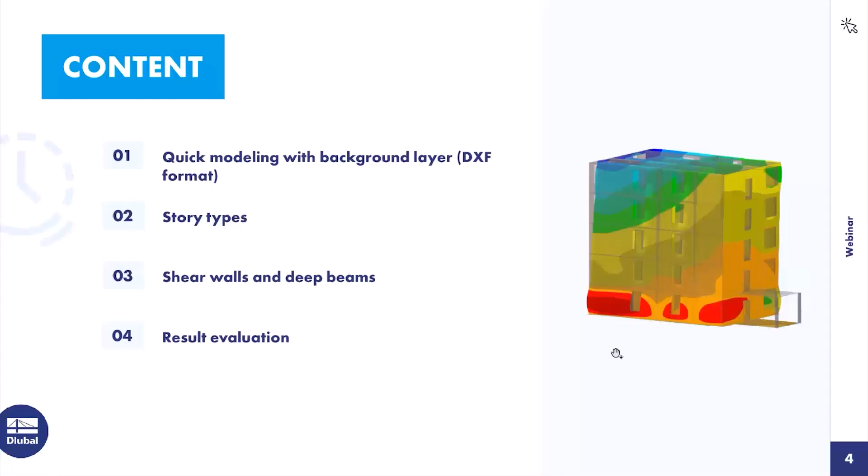Okay, then to our first topic, the quick modeling, here with a background layer for an easier way. I will import a DXF file, and it's a modeling option from bird's eye view, floor plan, top view, however you want to call it. And at this time we have added this button in the building model add-on.

It's an exclusive button, and you can see the objects you can generate or model in this bird's eye view. So then let's switch to RFEM 6, and I can show you what I mean.

Yeah, I start a new model. Let's call it building model. And at first we must activate the add-ons, of course the building model, and today also the concrete design, so I can show you the configurations and special options which are connected with the building model add-on when the concrete add-on is activated.

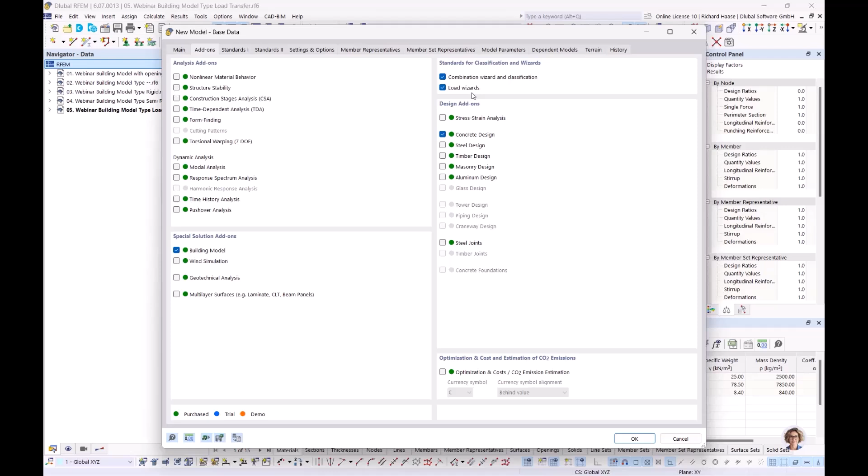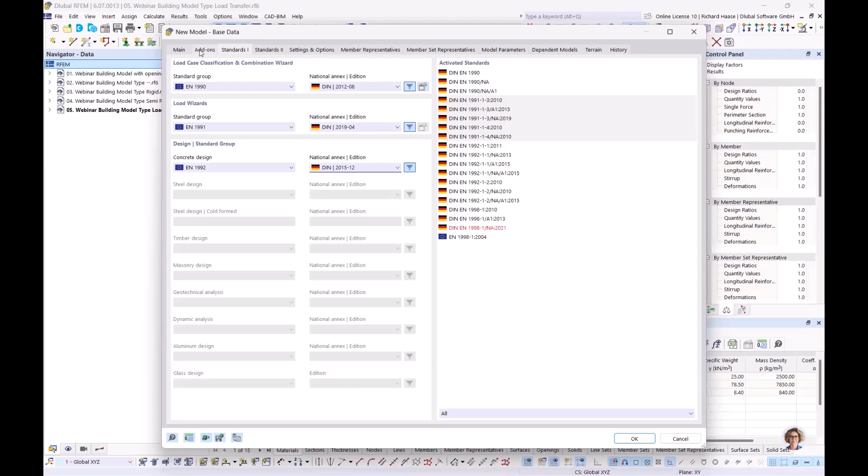And for the quick modeling, I also want to show you our load wizards. For this today we want to choose the German annex. So when you activate the building model,

automatically here under settings and options, our surface cells are activated, and this is a nice feature for surfaces which are, let's say, separated by lines or different parts, and you can control and modify the surface cells. But yeah, I will show you. So okay, then let's start with the new model.

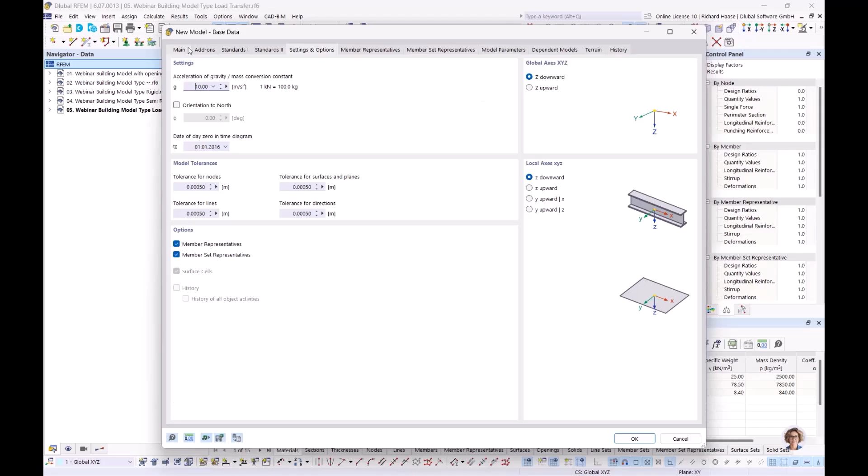Okay, then let's delete all objects so that we really have a new model. Let's start with the materials. There I need concrete at first.

Let's take C25/30. Then we need reinforced steel. Let's take the B500.

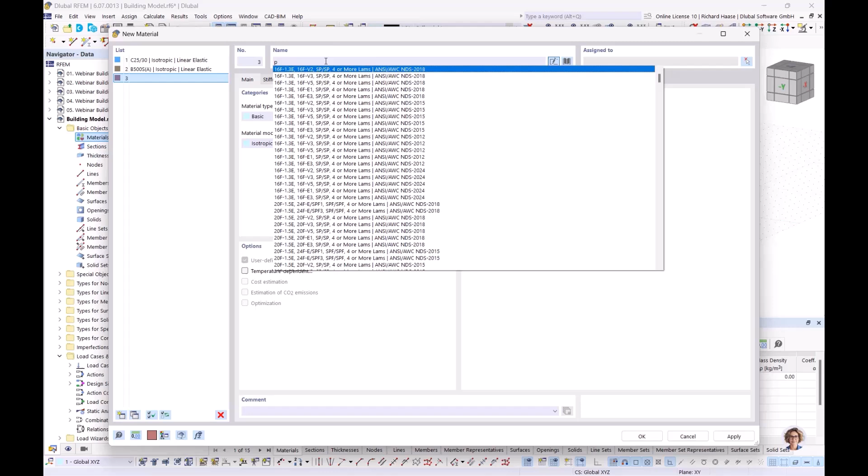Okay, and also we need masonry. There, let's take this one. Okay, then we have defined our materials.

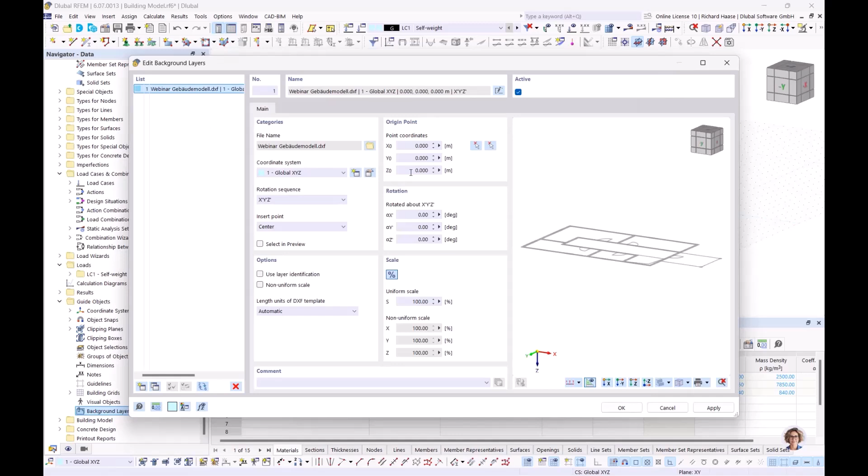Yeah, and okay, then I will upload my DXF file, my background layer, so I can show you what this building is about or how it looks like. And now we see it's nothing big, it's a simple model, but yeah, for this case it's good.

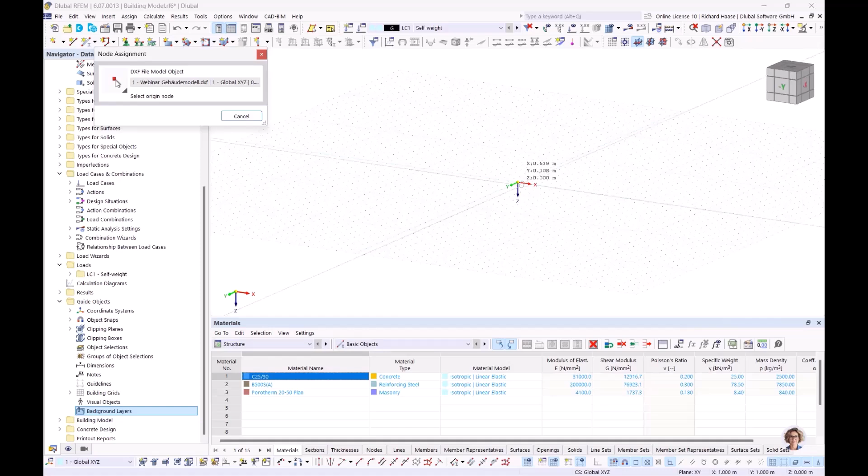Then let's change to meters. And when you add some background layers, you have two selecting points here. The first you can choose - I will set it here to the zero point - and the second you can choose in your DXF file. I added here some statical system lines. I will choose this line for this.

Now we have our DXF background layer, and the walls on the outside should be in masonry, and the inner side walls I will create in concrete. Also this slab cantilever, so not really cantilever, but it's only in the ground floor.

And here we have some columns. Let's go back to our definitions at the beginning. So materials we have defined. Now let's define our section. For the column, it's concrete.

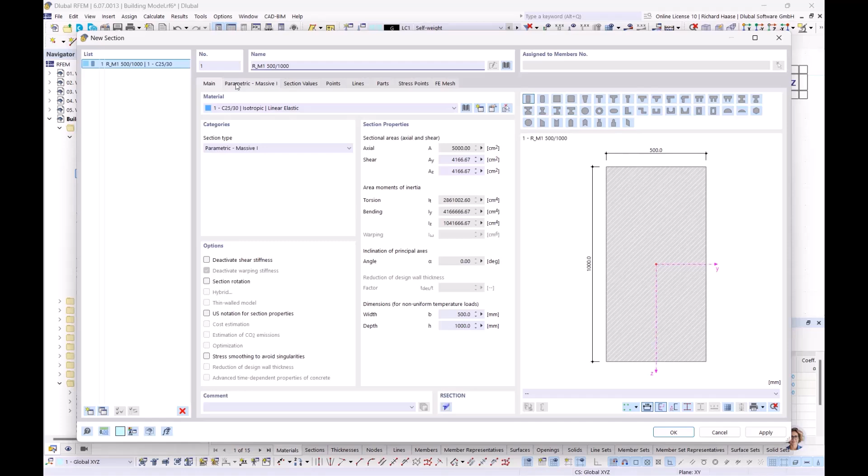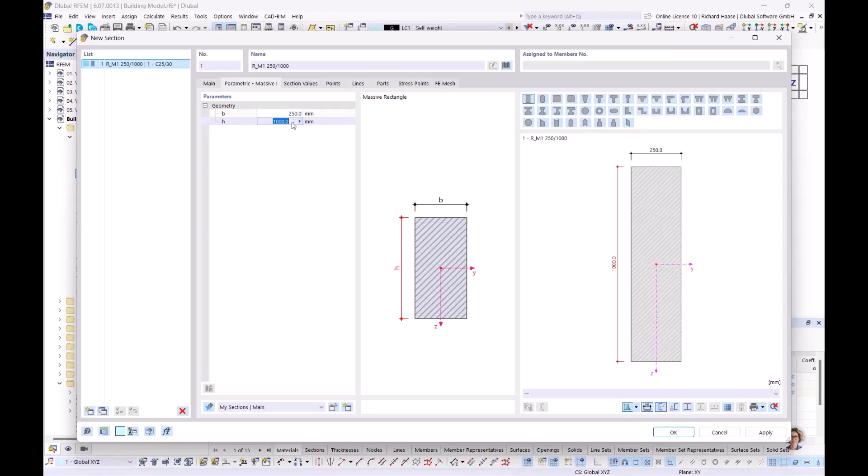Now I'll show you a nice feature. When you work with your DXF file, you have the option to measure the properties of the section. Let's take this - 25 centimeter, and also on the other side, also 25. Okay, let's say okay.

And now we need some thicknesses. Let's start with the masonry walls. And also we have here the same type. Let's choose this 24.

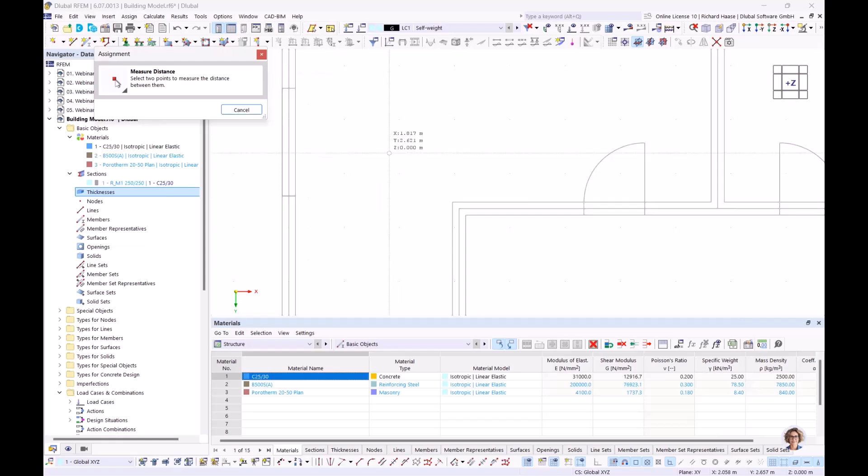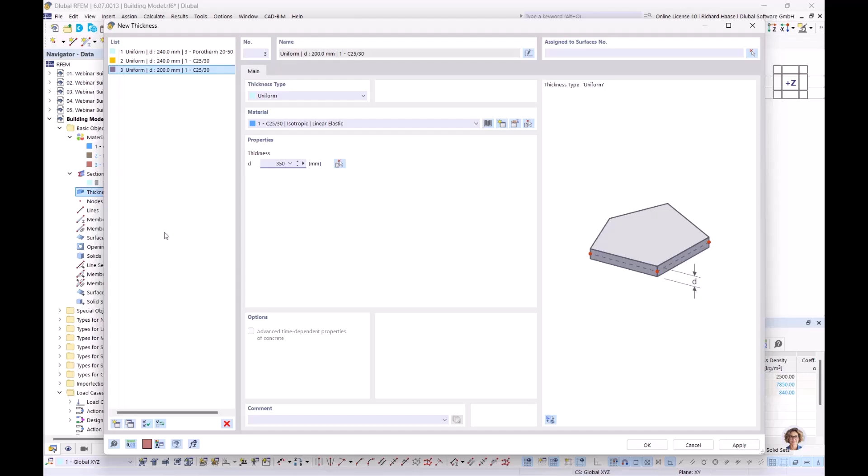For the walls on the inner side with the concrete material, we can do here best way 24. And for the foundation plate, let's say we want to have a thickness of 35 centimeter. Okay, let's say okay.

So we have defined the materials, the section, the thickness, and now let's go here. Then we must spring to the building model add-on, and we will define now our building stories.

A new one with a height of 3 meter, and now again 4. You also can model at first, but because of this fast modeling, you need to define the stories at first. And you can switch here, and now you see story heights here. And here are the floor modeling options, but I will show you at a later point.

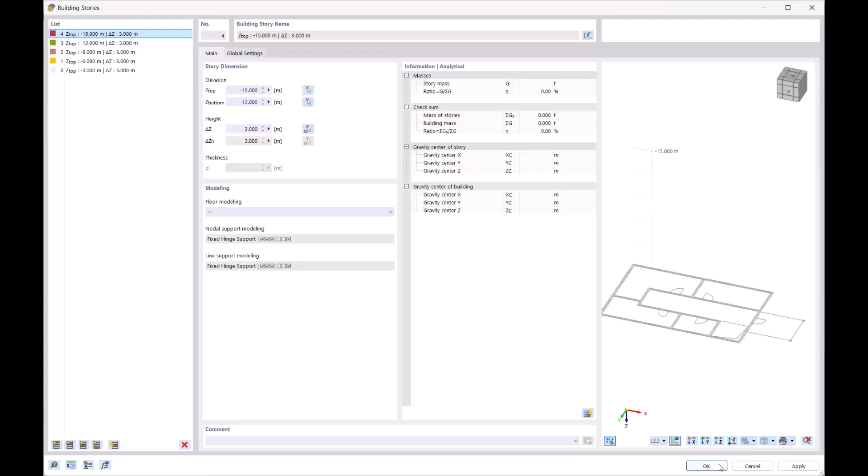So now we have our materials, our sections and thicknesses, and defined our stories. Now we can start to define with the fast modeling. Let's start with the walls - let's take here our masonry material, and now we can...

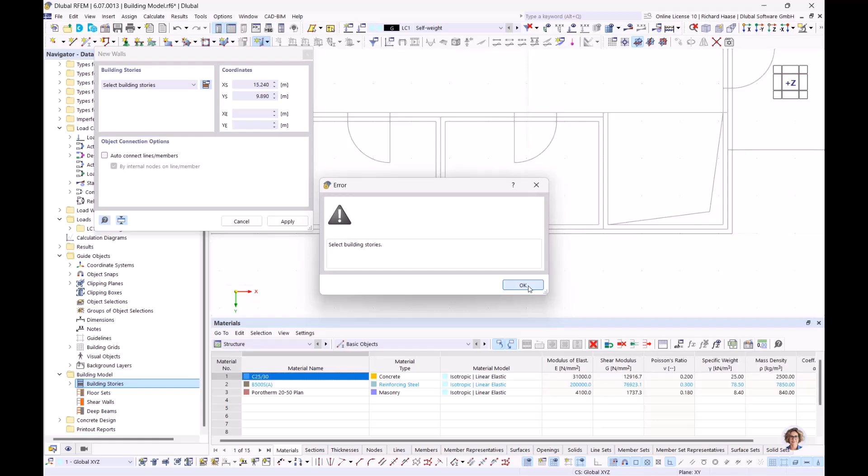For this you need to define the stories. So you can choose if you want these walls in this example only on one floor, or on different floors, or in our case we want to have these walls in all stories. Then apply, and let's start.

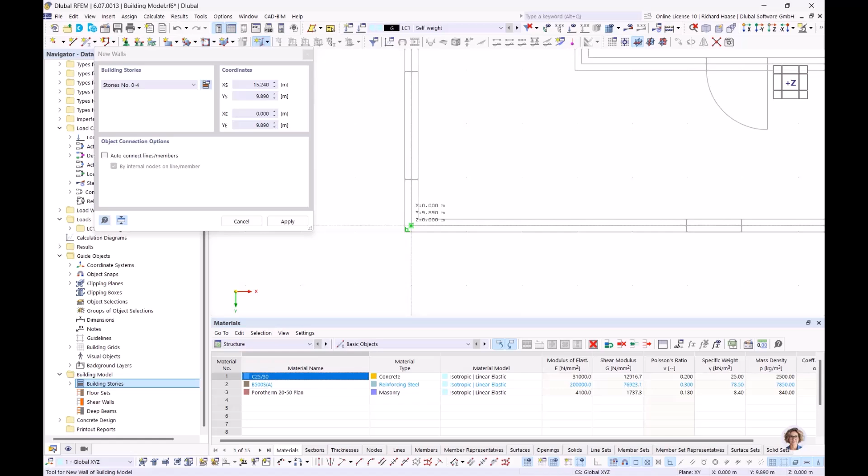So now you see here this mess, and it's also because of the building model add-on. The add-on now creates a center of mass, and now all these masonry walls are edited with their mass, for each story. So you see now all outside walls are created, but let's continue with the inside walls.

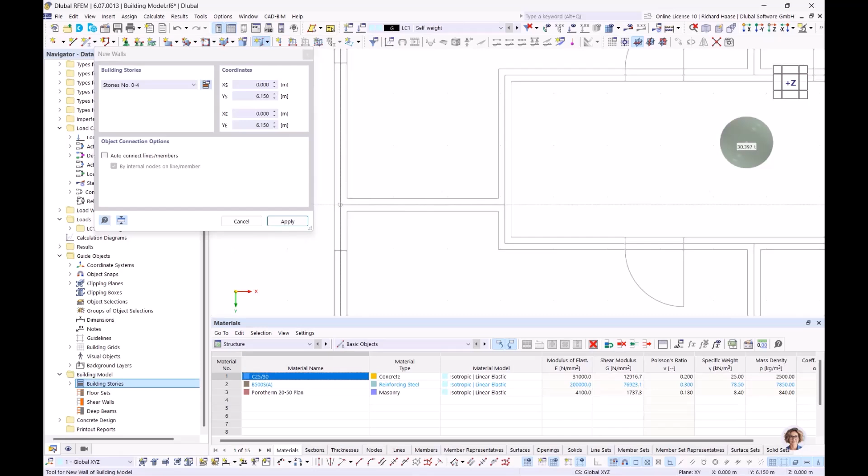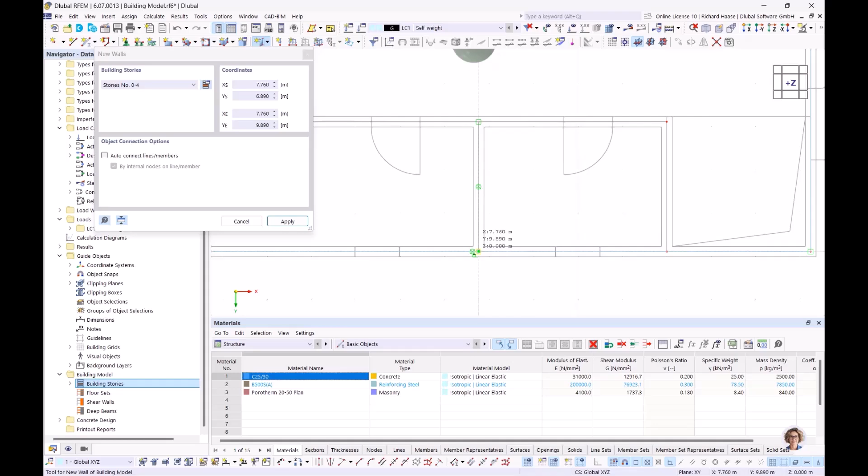24, yeah. Okay, here and here. Here and here. And the last one is here. Let's check if I get all walls. Yeah, it looks good.

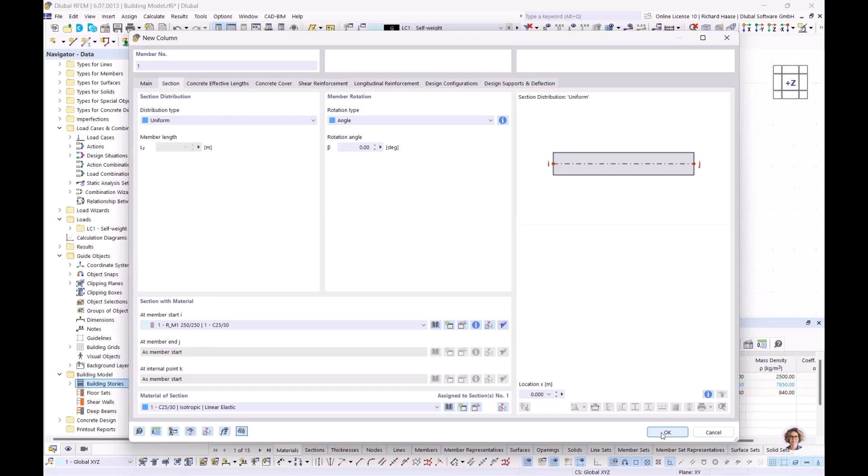Okay, then we want to define our columns with our section we have defined before. And now we don't want it in all stories, only in the ground floor. Say apply, and click here and click there.

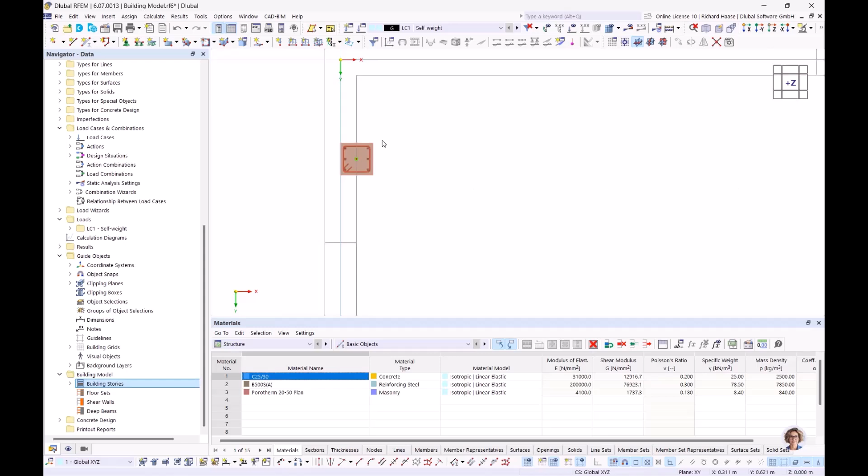Then same procedure for the floors. So 24, okay, and for all stories, apply. Oh, a moment, that's wrong. Okay, again - floor for all, and apply.

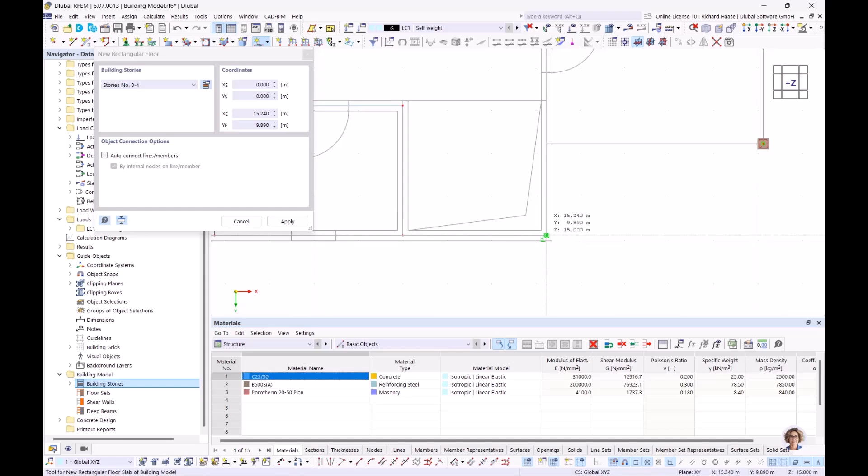And yeah, okay, now we have also floors. Now we need this, I say, cantilever floor. Okay, also 24, and only in the ground floor.

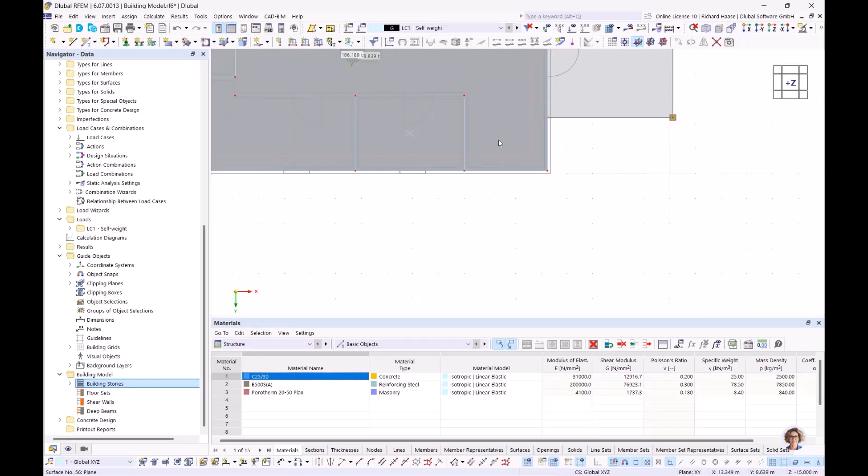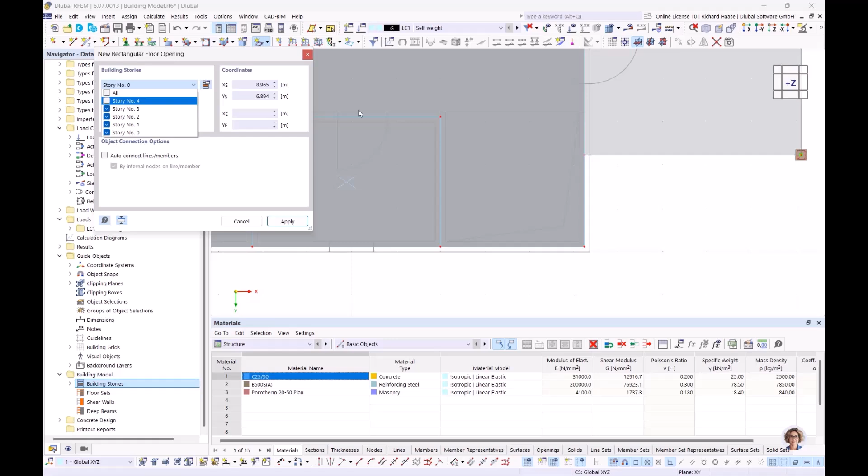Let's start at this point. And here we have an opening in the floors for stairs. Let's define this floor opening. Here, let's see - not in the last floor. And okay.

So now we have our openings, and you see, in a short time you have generated a building. The only thing you must generate manually are the openings, the windows and the doors, for example, or other openings in the building.

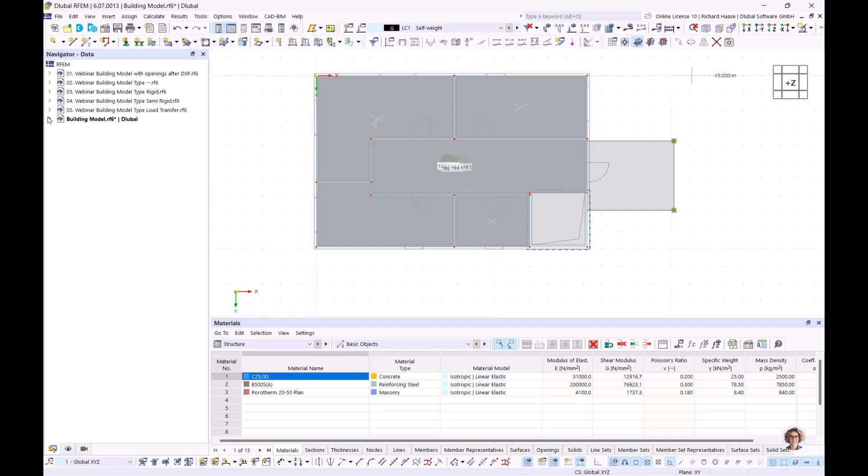And to not waste time, I have modeled this here. Maybe I can switch back to the full model, and there you see the openings. And I added also some load transfer surfaces.

Because imagine when you define wind loads and you define it only on the masonry surfaces, these areas for a closed model are missing at the end. So you can define these load transfer surfaces, and these surfaces only transfer the loads to the sides, and don't have a stiffness effect or such thing, only for load transfer.

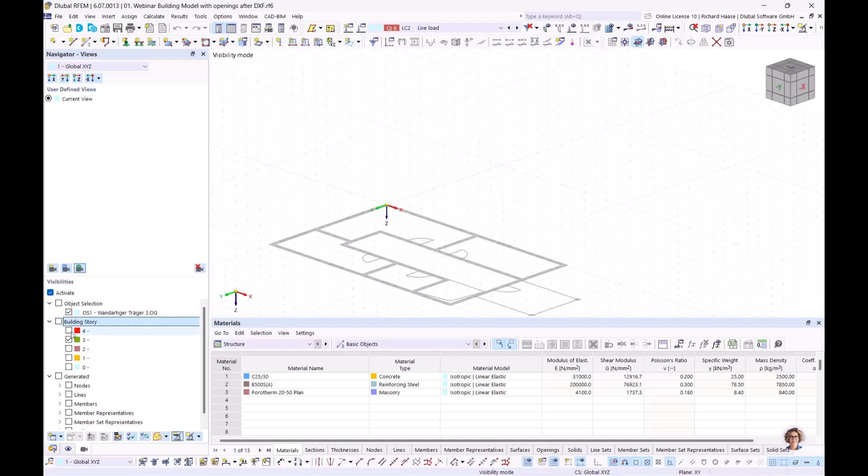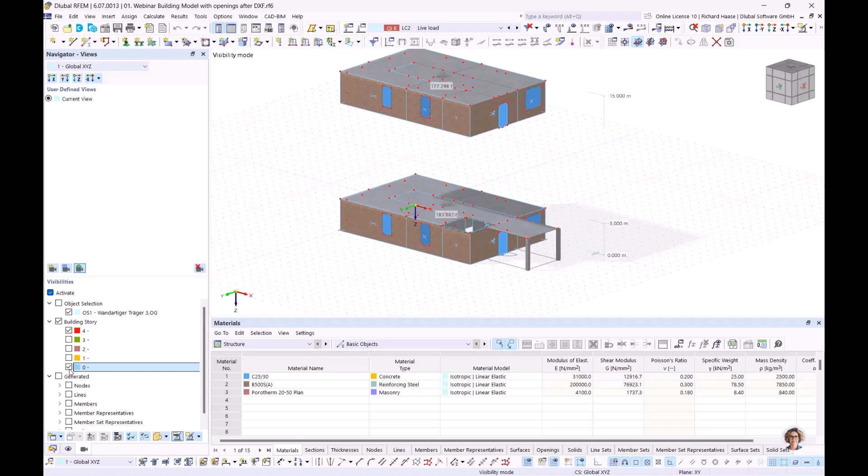Okay, then another nice feature which the building model makes automatically is in the navigator views. There is a point 'building story', and when you activate it, you see every story you define - there's automatically created a view, so you can fast spring between the stories for loads and such things, and I find it's a very nice feature.

Okay, then what I want to show you also - for example here you see it's one big wall, and you see these blue crosses. Oh wait, maybe we change the view. Oh, it's not functioning how I want it.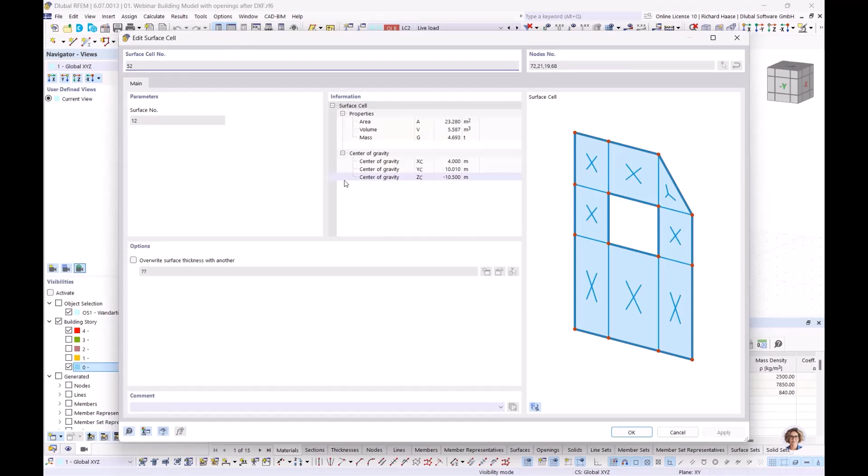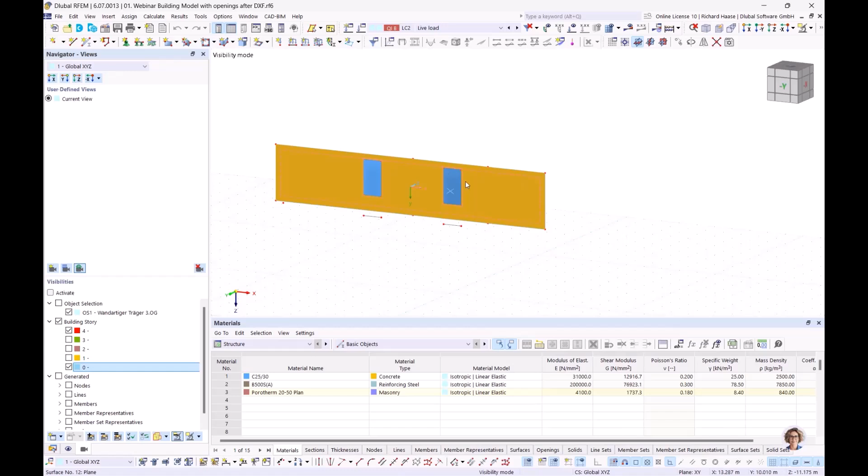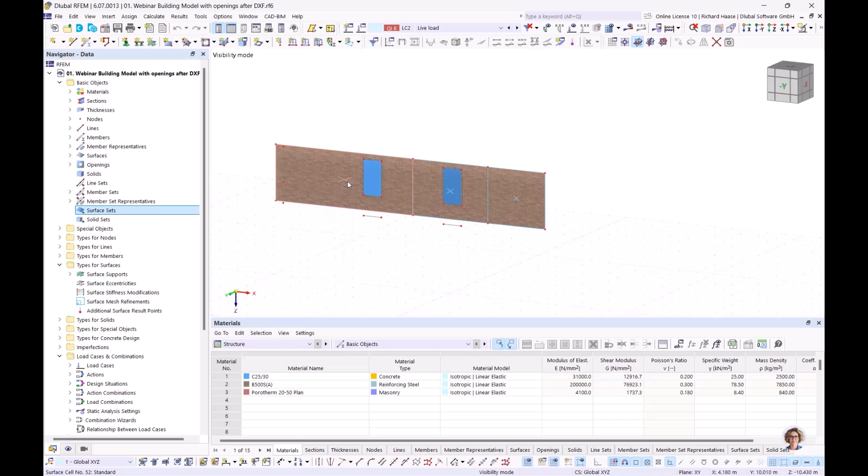You have only one big surface, and with this surface cells you have the option, when you click on the surface cell, to give these cells other thicknesses. Then with the different thicknesses you can also design the surface as one surface, so it's nearly the same effect as when you use surface sets, but it's an easier and faster way to define this.

Then I want to show you in the concrete design, when you activate the building model add-on and also the concrete design, you find in the configurations some additional points which are only possible with this model add-on - some options for deep beams and for shear walls. So that's now possible.

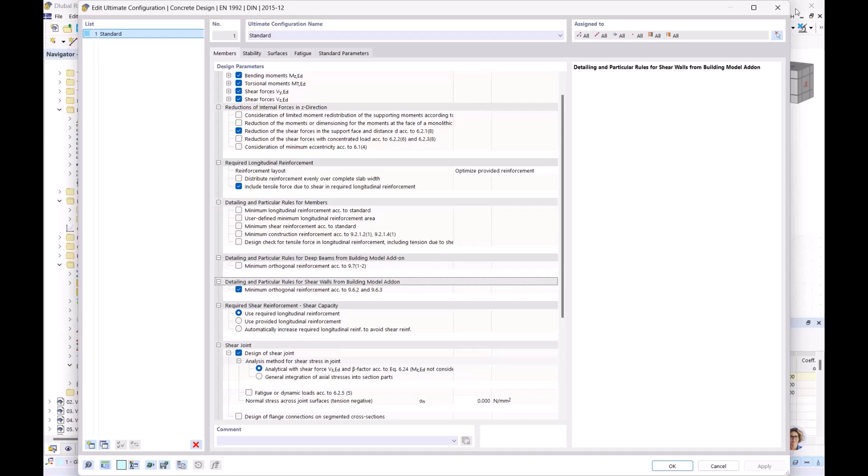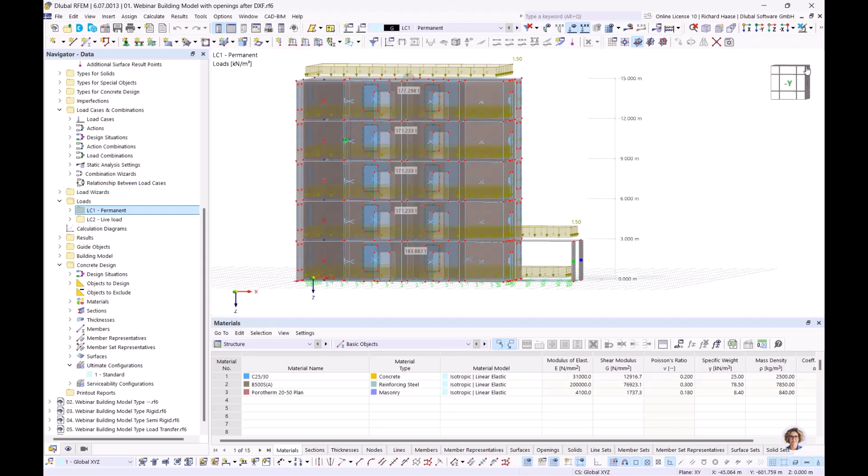Then what I also told you before, maybe we switch to the loads. Here we have some permanent loads, nothing special, and here's some live loads. Now I want to show you the easy way to design wind loads with our load wizard.

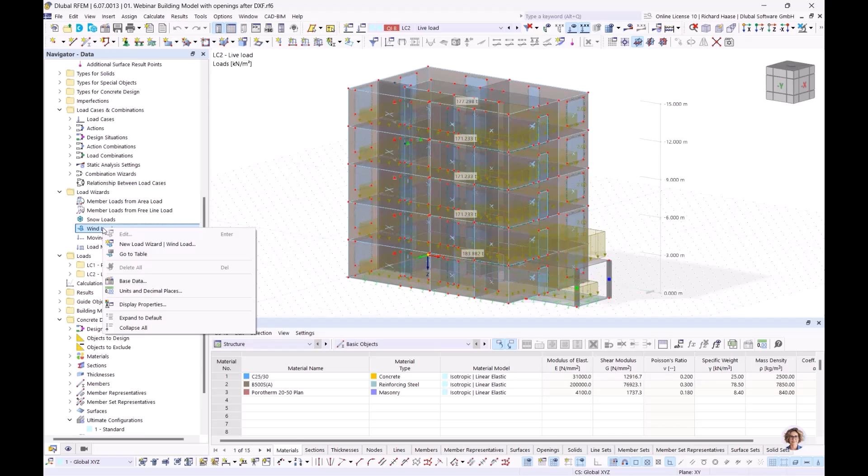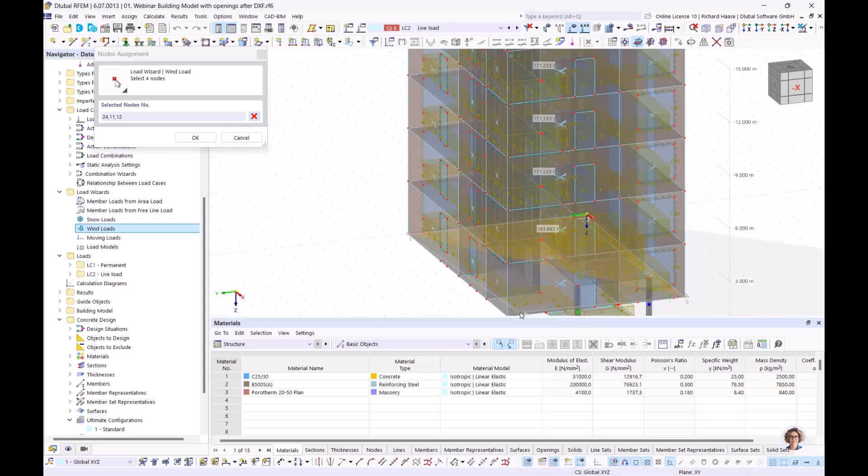We find this here, and for example here our wind loads. So we have a flat roof, and now we want to find the base corners, and also the roof corners. Now you see all walls are automatically - RFEM sees automatically the needed walls and roofs.

Another nice feature is the definition type with map and parameters. That's the way I switch to the German annex, because you need this national annex to define or to get or to select on the wind load map.

So let's for example choose the headquarter of Dlubal, it's here in Tiefenbach, Zellweg 2. Okay, why I'm not connected? One moment. Okay, now we have it.

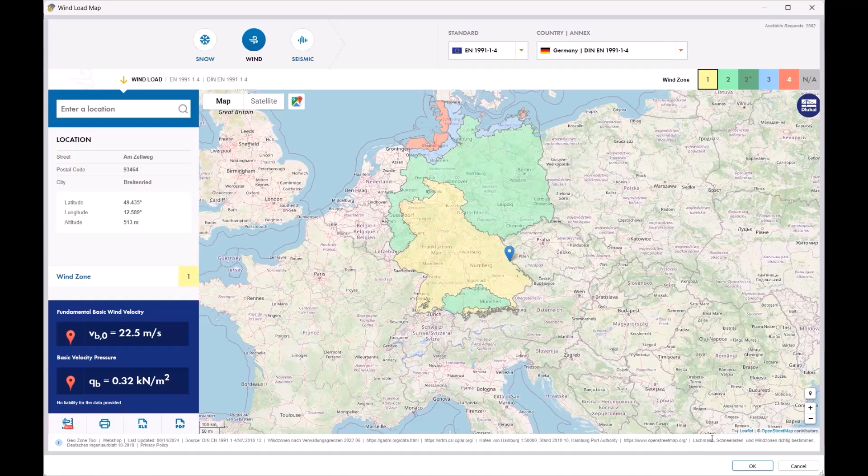Okay, let's say okay, and you see the program transfers information from these wind load maps - the terrain category, load zones, and all information for the wind loads.

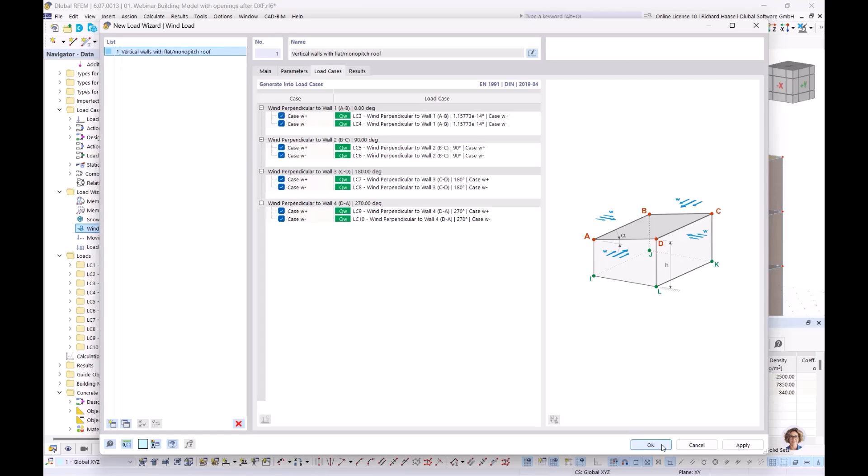Also, you can generate per direction automatically load cases. Let's do this here with this button. And you see all directions. Now we have our wind loads fast and correctly generated for all directions.

I find it's a very nice feature. The same for snow loads, but also a connection with the Google Maps view. So with this load maps, the same procedure. And then for buildings we have very fast the snow and wind loads generated.

Okay, that's the points about the quick modeling. Then I will switch back to my PowerPoint presentation to the second point, the story types.

After definition of the stories, you have these 4 types. What are these 4 types exactly? I will tell you now. Before that, independent of which type you choose, you get specific results for mass and story by story results. I will show you at the end of my webinar. So okay, then let's start with this first type.

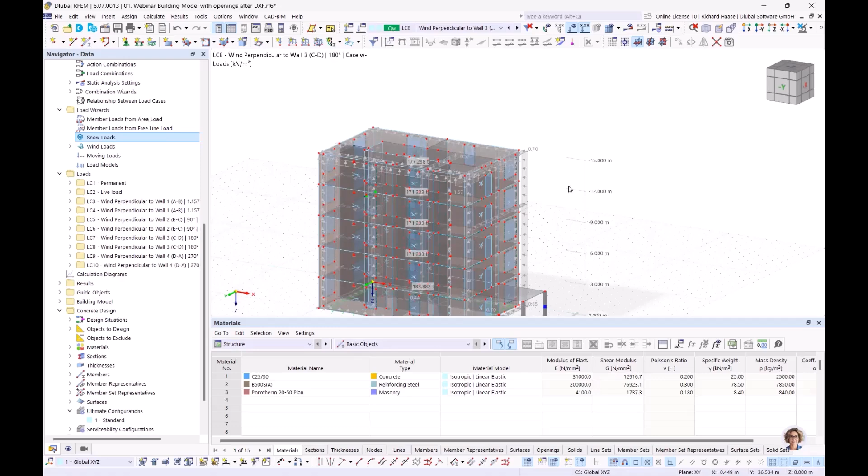Okay, then let's switch back to RFEM 6. So maybe for a better overview, I will close some windows. Okay, I've saved another way. Now we have our four types. Let's start with our type load transfer, so I can show you what is happening here.

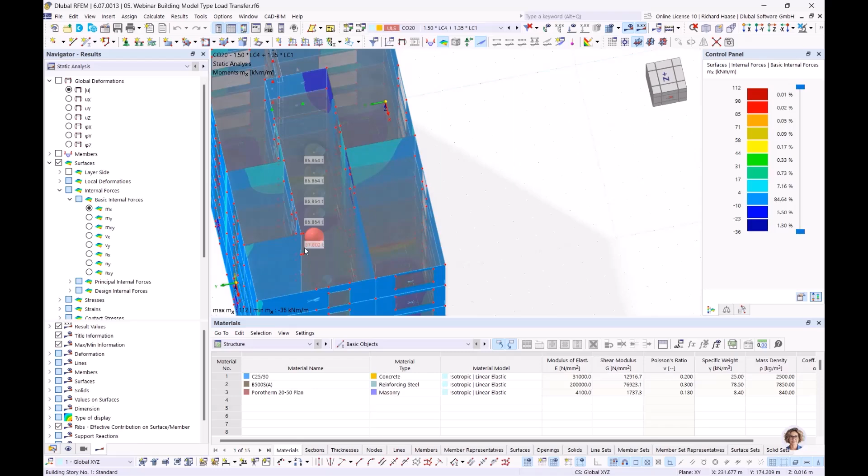So we want a static analysis, and for example bending moments. When you see here, we have no moments in the floors, no forces in the slabs, only forces in the walls. So here no wall, no slab is activated. So it's really a simple load transfer.

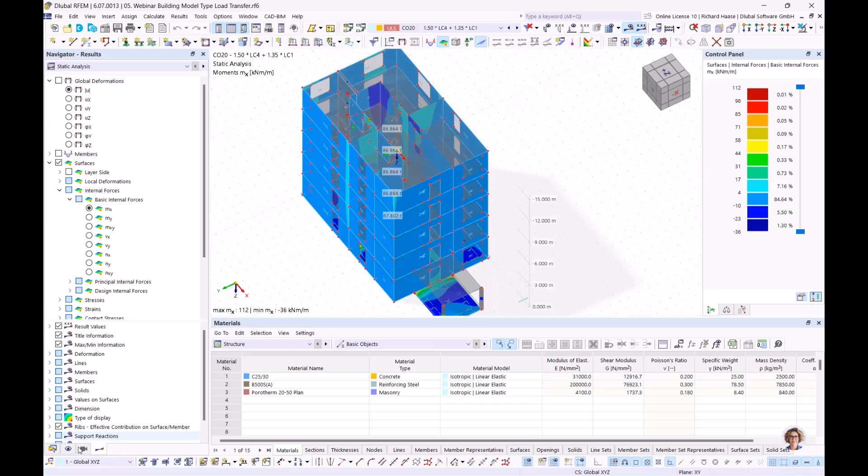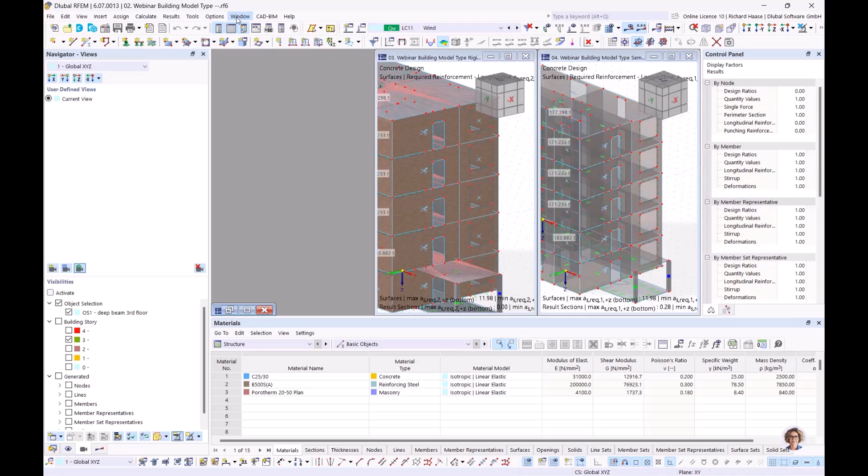So then we can close this too, and now let's compare this way. Moment, and maybe we can minimize this, and again here. So now we have our rigid type, and I choose the third floor.

Okay, and we want to have the same overview for our semi-rigid type, so I can show you the differences directly. Visibility is still activated. Okay, then let's choose a load case with wind and self-weight for both.

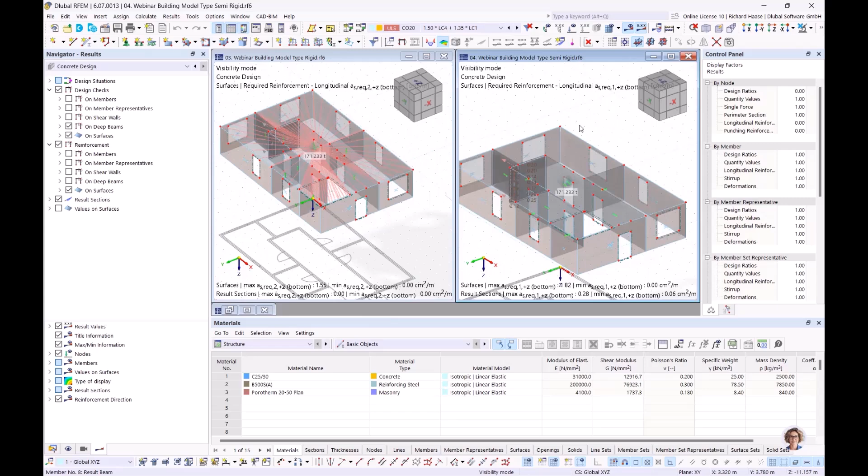So when we now switch to the static analysis, we have here an additional point, analysis of building stories, and this analysis is only possible with the type rigid diaphragm or semi-rigid diaphragm. So then maybe let's look at the floors first.

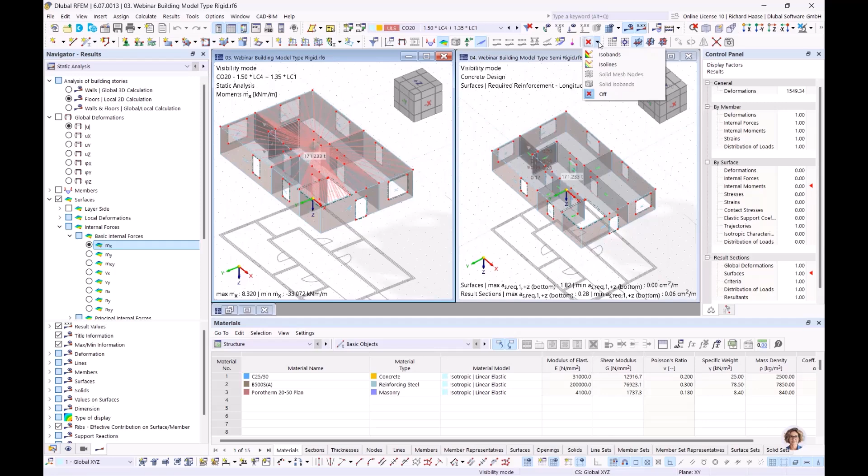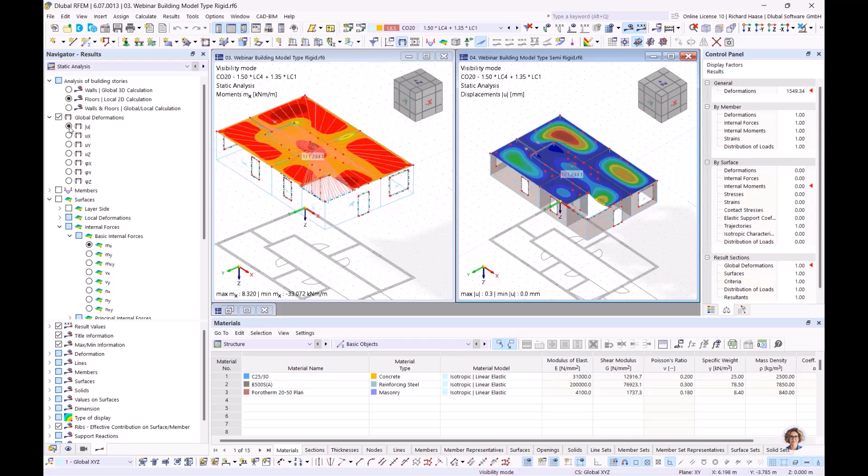Moment is okay. Let's switch to isobands. And here we need also MX. You see here between type rigid and semi-rigid there are no differences, it's exactly the same calculation. Also when we switch to deformations, for example, it's really exactly the same.

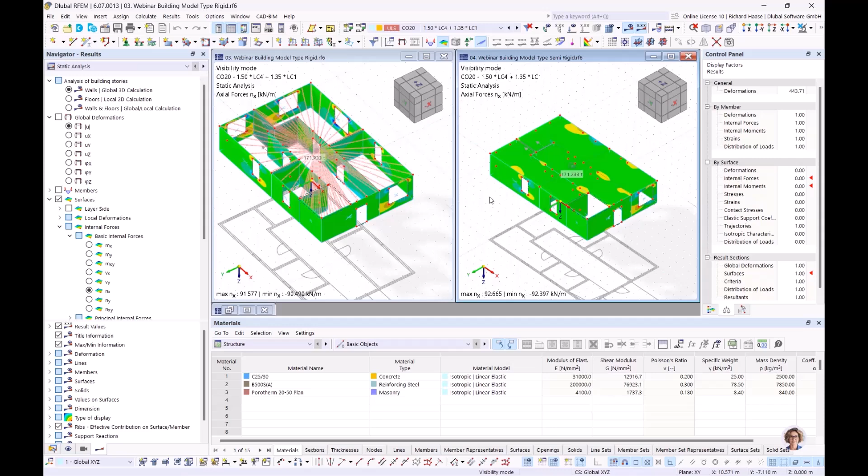And the difference is in this walls calculation. So when we look at our rigid type, maybe again at X, also an X, yeah you can see it here. In the rigid type, the slab is here with infinite stiffness and doesn't have an effect on the calculation for the walls. So the walls stand alone more and more.

And here in the semi-rigid type, the slab also has an effect in the 3D calculation of the walls. So also for the deformations you can see it here. Here we have only 1.8 because of the stiff slab, and here this softer slab, through the real rigidity of the slab, we have a bigger deformation. I call it the traditional structural analysis, calculation with positions in a static analysis, and you can see it.

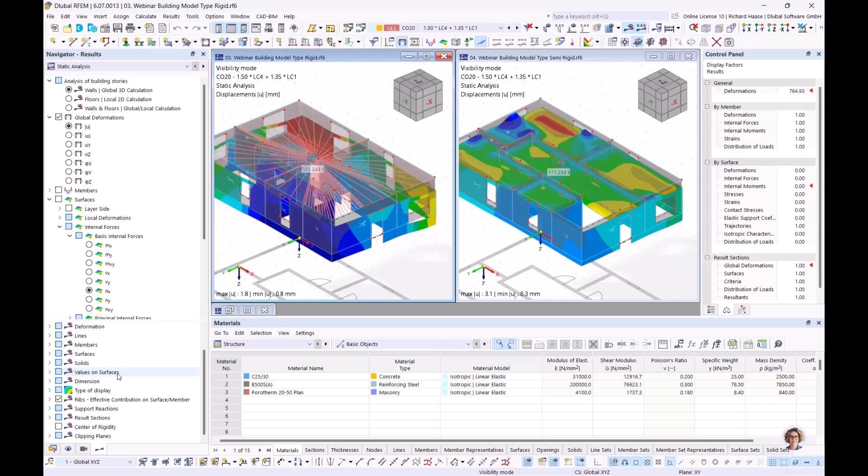Wait, let's activate the values on surface. Let's again switch to X, let's make it this way, we see it better. So the walls, let's see here, these 0.238, and the floor 1.005, and these walls and floors are only a result of walls and floors editing separately. So when we see it here, we have our 1.005 and here our 0.238, so you see it's independent, it's not affecting each other.

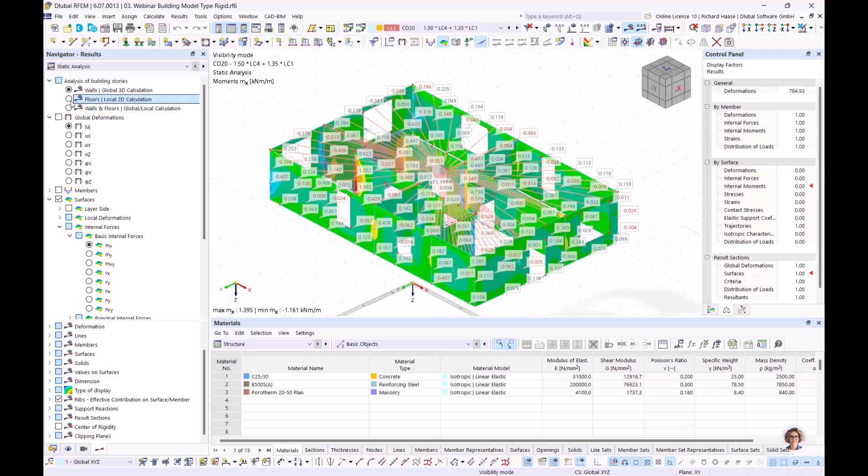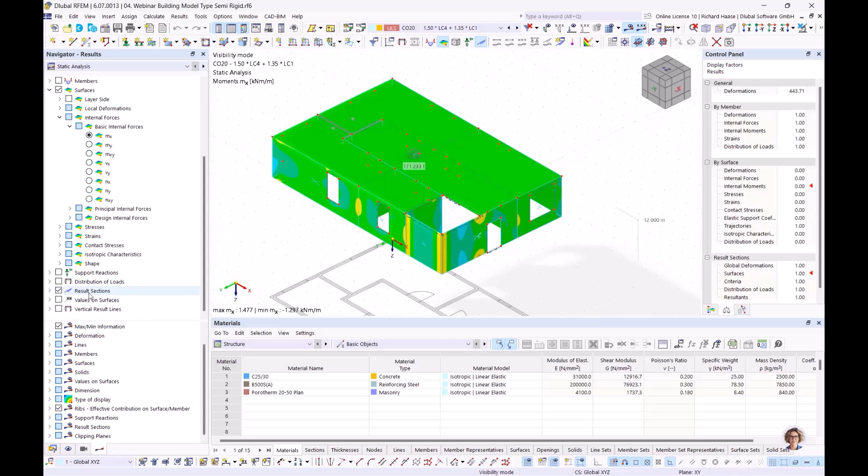So that's the rigid type. Then let's switch back to our semi-rigid. Let's go here maybe, surface 5.8.

Here you see we have different, or wait, it's in the global deformations we see a difference. So we have here deformation 3.1 and here 0.3, and here it's a mix of both. So the results are working together, let's say, in this way.

And again here to rigid, with the deformation - sorry, it's a better way - so let's see, here we have for the walls 1.8 and for the floors 0.3, and this shows only the maximum of one of these, and it's exactly the 1.8.

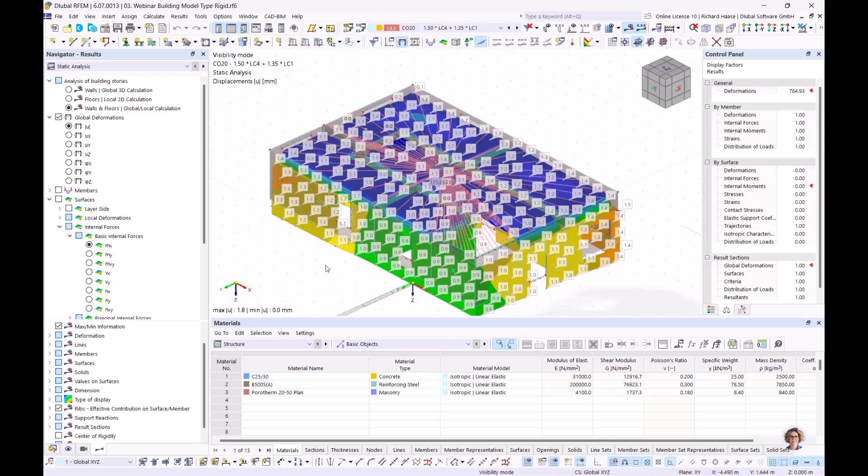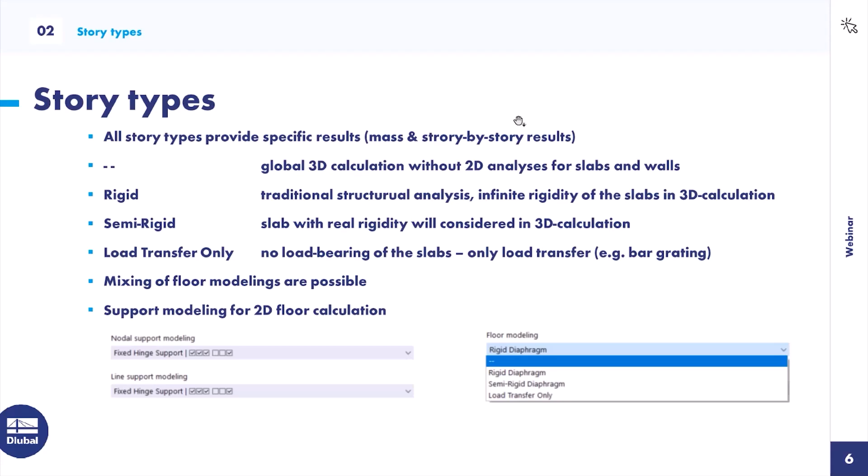That's it with this point. Then I will switch back to my PowerPoint presentation, to the shear walls and the deep beams.

Both objects you must define in a manual way and choose the surface or surface cells, or also you can choose members to define these objects, these shear walls and deep beams. Both objects automatically generate a result beam, which is an integration of surface forces integrated to member forces.

You also have the option to generate result sections, and result sections create an intersection line, and on this line you can see results on this area, let's say.

It's important for deep beams to consider nonlinear calculation, or the forces which come through this surface type. It's according to the ratio of height and length, and when this height to length ratio is smaller than 0.5, so when you have a really long beam or a long surface with a low height, then this result beam is perfect for this calculation.

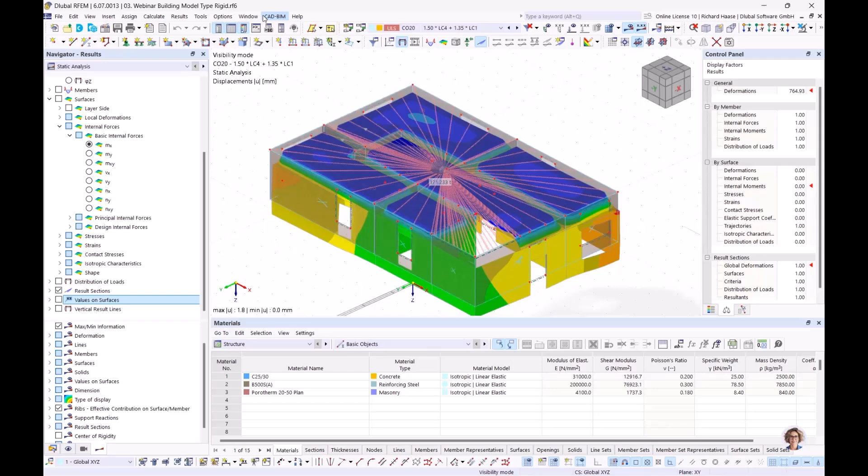Okay, then let's switch back to our RFEM model. I will work now with this type, and want to show you how you can define shear walls and deep beams. I have modeled it before, so you can create a new shear wall.

You must assign objects. I have chosen surface and cells. Let me show you the shear wall - that's a wall from the ground floor to the highest floor.

Then when you activate the design add-ons here, in this case concrete design, you see the typical tabs you can find also in every other concrete design object. You can define shear reinforcement, longitudinal reinforcement, and all the other definitions.

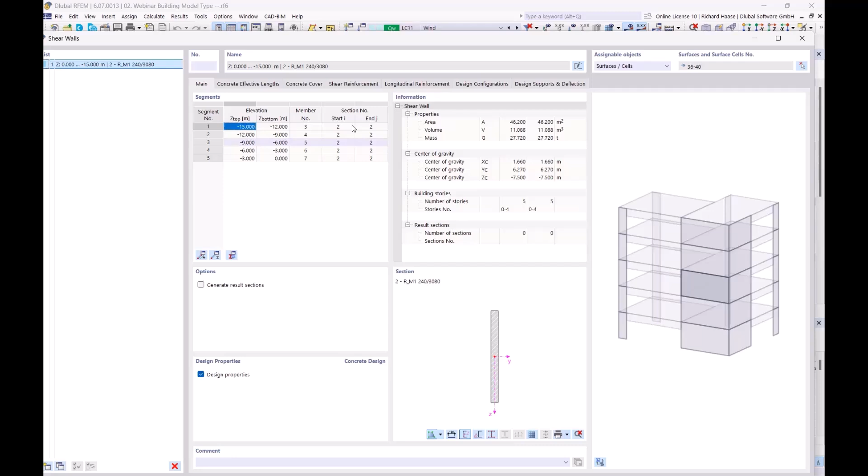Also, to the definition of the reinforcement - when it is a simple wall in this form, or for some other simple geometries, it will also be possible to define your reinforcement. But when you have a completely individual form, it is not possible to create such reinforcement in RFEM 6.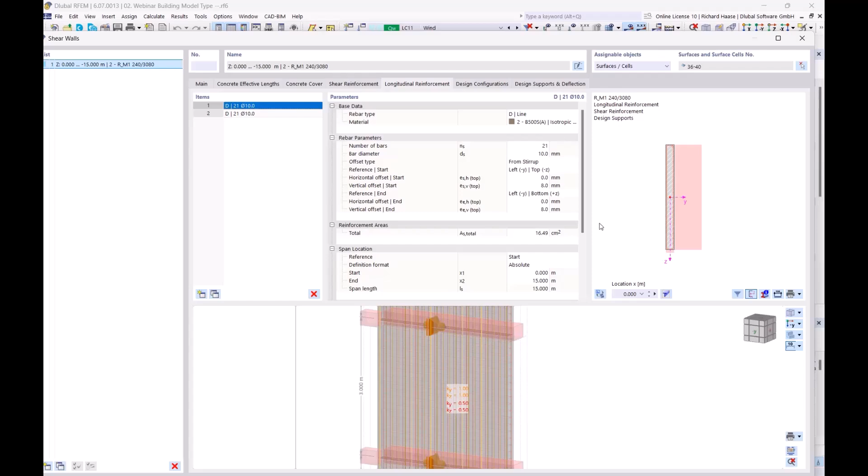But we have an option here with this button - you can open our section editor, and RFEM exports your individual section to our section editor. Then you can define there the reinforcement you want, and send it back directly to RFEM 6, and it is actualized here, and then you can calculate it with your own defined reinforcement.

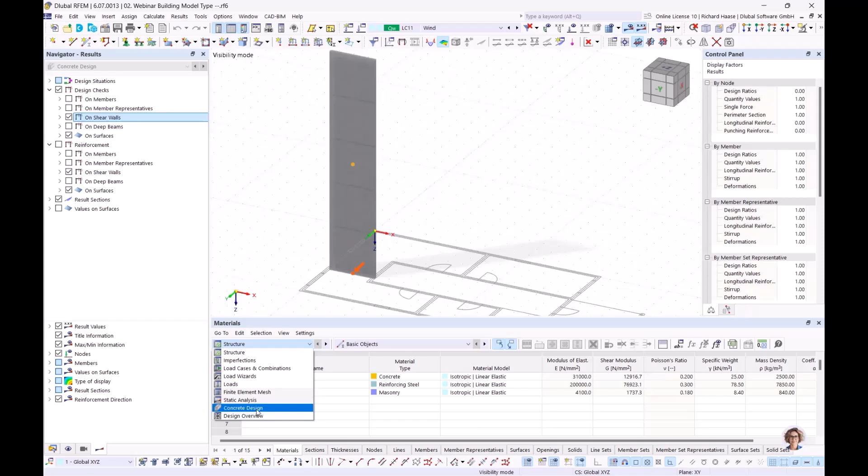Okay, then let's see - we are in the concrete design, and you also see we have here additional object types: shear walls, deep beams. In our concrete design we have design ratios and reinforcement for shear walls and deep beams. So you can see here, like for other objects, calculations and the results for analyzing.

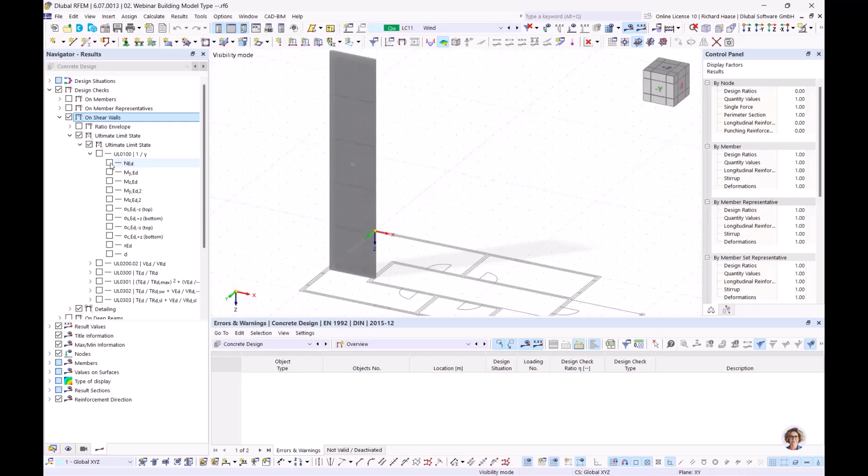A big point for these shear walls - you guys also have it in the table, but I will show you in my next chapter. Here, for example, you see the axial forces which you get per story, and the moments, and it's very good for controlling and for seeing which forces are here.

Okay, then the same procedure for the deep beams. The deep beams you also can define like the shear walls, it's the same. Here I generate result sections because, what I told you before in the PDF presentation, the height to length ratio - you should look on this.

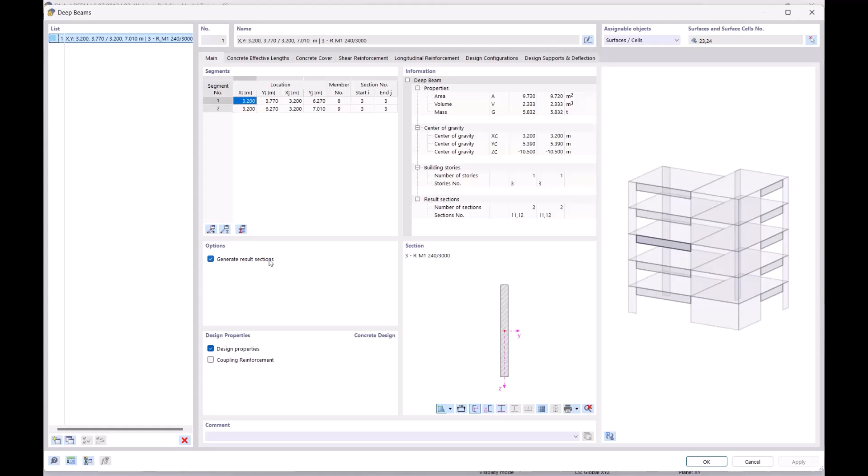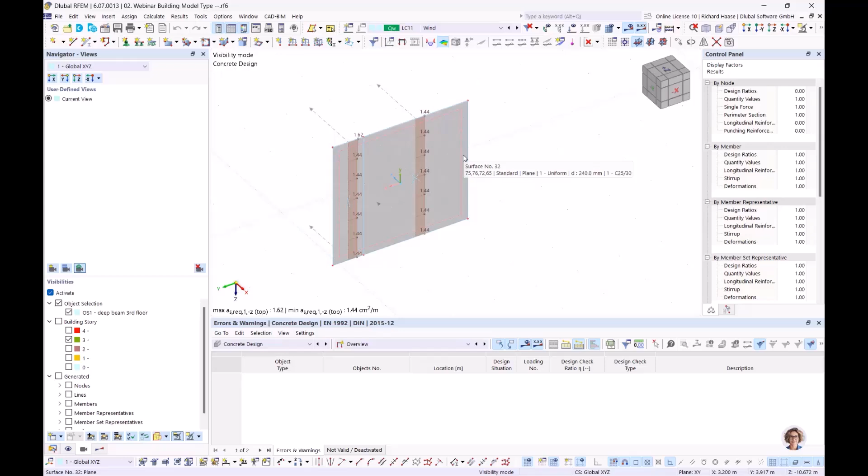I want to show my deep beam. I have created my own object selection for this. I have very few loads, so this is only construction reinforcement. Normally you have more on the bottom side. But I want to only show you the workflow, how you must work with this, or with these results.

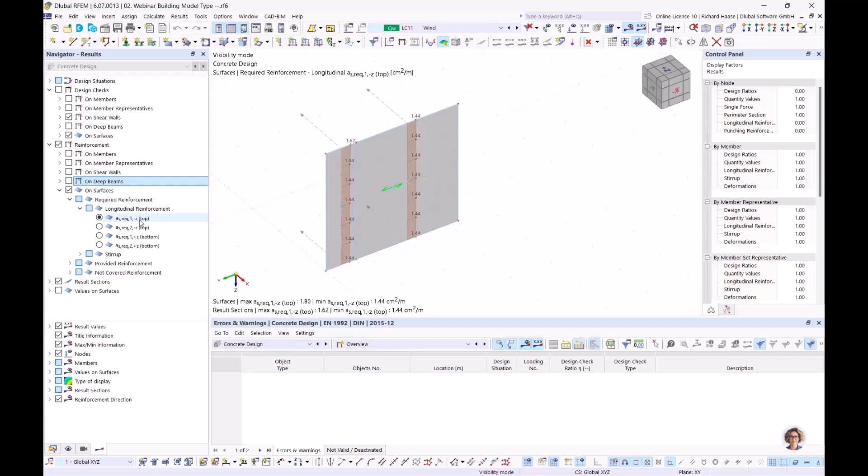Okay, so when we look at the reinforcement on our deep beams - no, sorry, we need a surface, of course, because the deep beam here is our result beam, but because of the height to length ratio, we must do it over the surface with result sections. You see in this direction it shows the required reinforcement on the bottom side, where you have this steel tension, what you need. So let's remember, it's the one direction, and the second direction is for the shear reinforcement.

So when we look at our result diagrams, let's remove all, and go to here, 1, 1.

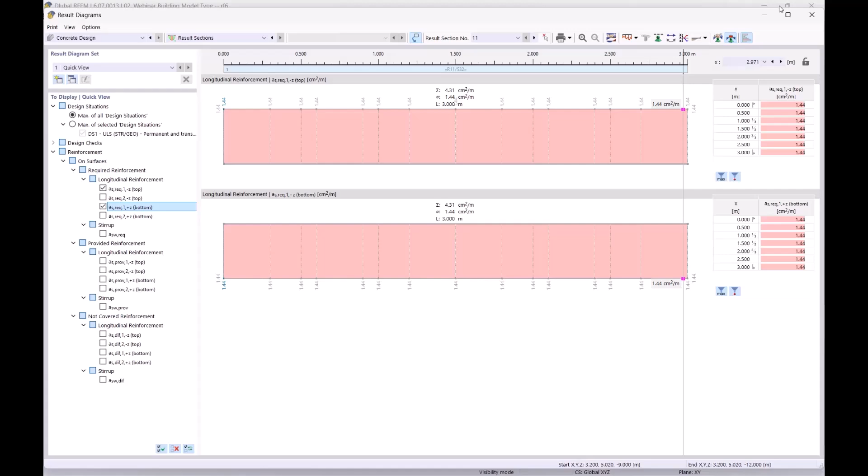Then we have these results here. Now we must define a smooth range over the whole length, so we have 3 meter constant, and now we have our result. So we need this 4.31 plus 4.31, giving a sum of 8.62, which we must put into the bottom side of the deep beam.

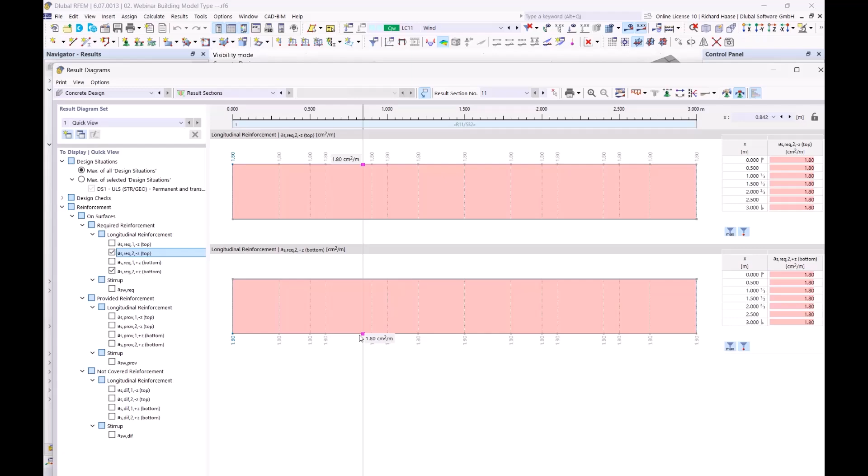And the shear reinforcement: we look at both directions, top and bottom, and choose the maximum value. Here it's nearly the same because we don't have big loads, but we must choose this 1.8 for the shear reinforcement. That's the workflow we have at the moment.

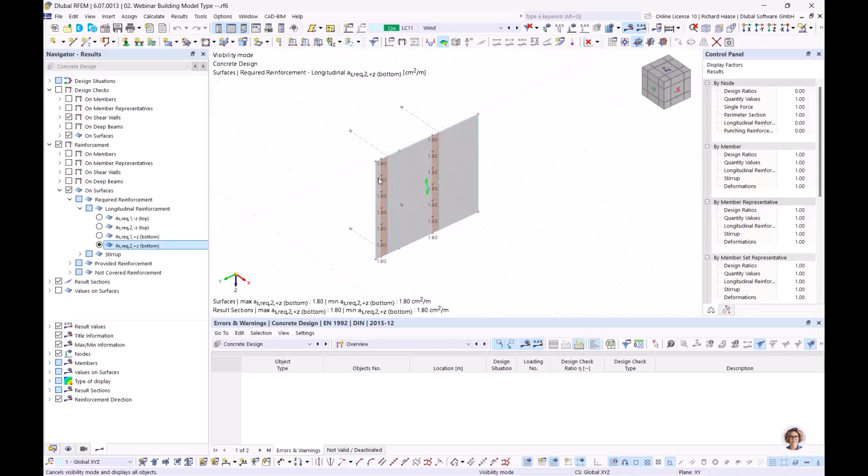Okay, that was about shear walls and deep beams. Let's cancel this visibility, and let's switch back to the PowerPoint presentation, to the last chapter, the result evaluation.

When you click on static analysis, you have results by stories, with 5 tabs: the center of mass and rigidity, story actions, interstory drifts, then forces in deep beams and shear walls. Maybe it's easier when I show you on the program.

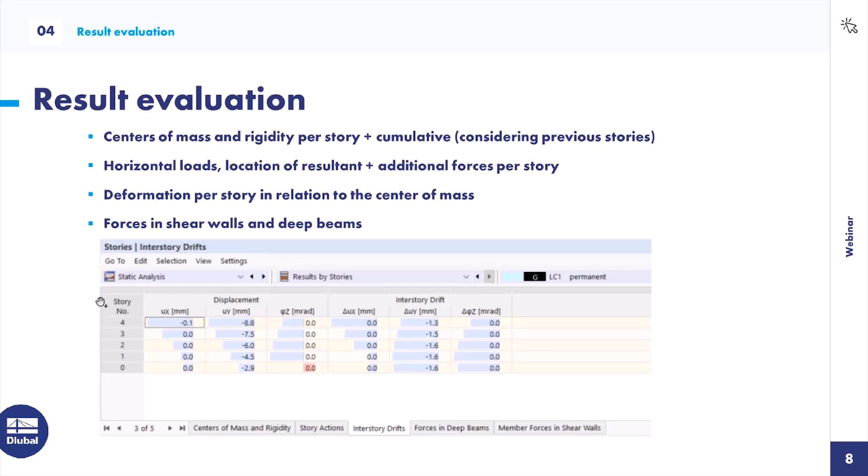So let's switch again to RFEM 6, and let's go to the static analysis and results by stories. Let's start with the first tab, the center of mass and rigidity.

The mass shows the mass per story, and you see it's nearly the same here. Only the ground floor has more mass because of our foundation plate. Out of these masses, RFEM creates and shows you the mass center for every story, and we also have the cumulative mass. In the top floor it's exactly the same, also the mass center.

The difference with the normal mass is that these masses are added. So this mass is the third floor plus the fourth floor, it's an addition. So the mass is growing from top to bottom side, and considers the mass from the previous stories. Out of this, you have another center of mass, and this is the center of cumulative mass.

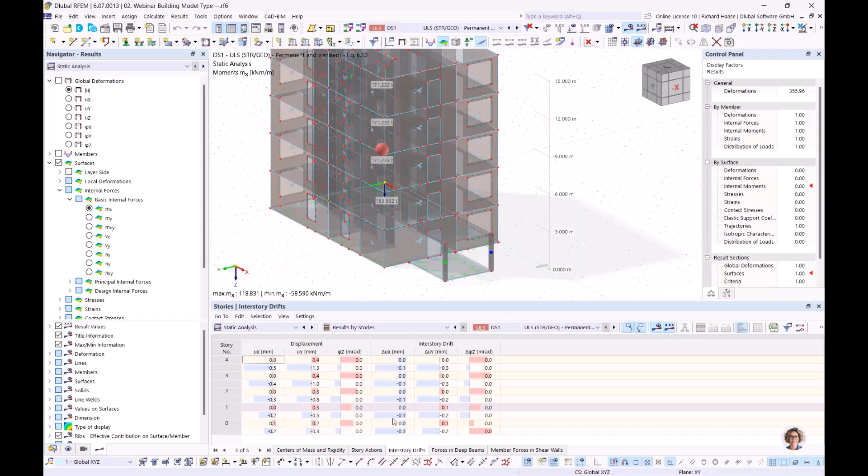Okay, then we have the interstory drifts. It's hard to see here because we have such low loads and a real stiff building. But you can see the displacement in the x and y directions, and if you have more loads, it gives a very good view of the influence of every story, the deformations per story.

And also here about the deep beams and shear walls, you can see the results of the result beams which are created for the deep beams and the shear walls. You can see all forces which are there in which story - for example the axial forces, you see how they grow every story, which I showed you before in the graphic menu.